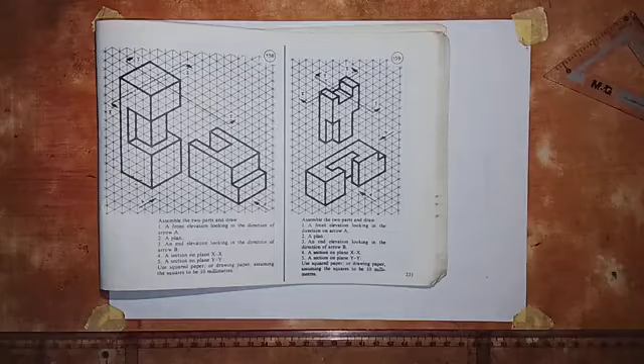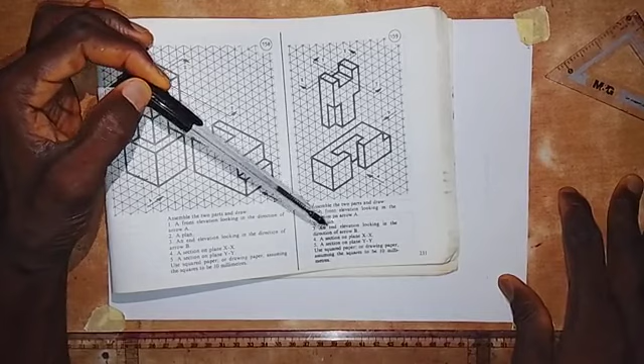Here we are still working on page 231 of J.N. Green's Technical Drawing Textbook, and I'm going to work on question 159: assemble the two parts and draw a front elevation looking in direction of arrow A, plan view for question 2, an end elevation looking in direction of arrow B for question 3, a section on plane XX for question 4, and a section on plane YY for question 5.

Use squared paper or drawing paper, assuming the squares to be 10 millimeters. I don't have squared paper, so I'll be using drawing paper here.

We are going to assemble this part first, and for the remaining questions we have a video for each one, including this assembly. So let's assemble the part first, then we'll work on the front elevation and the other questions, each with its own video.

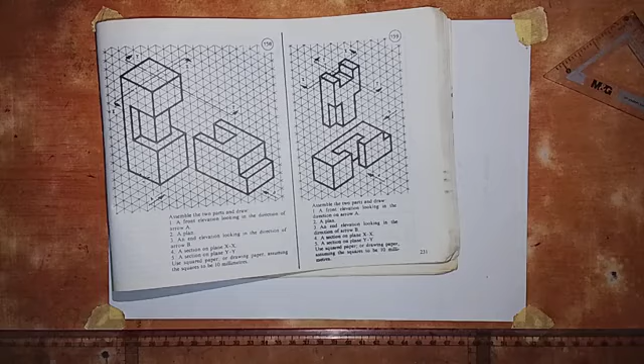For the assembling, we are going to put these two parts together. This one enters here, so we are putting this one entering into this. First, let's start with the construction of this one, then bring it in.

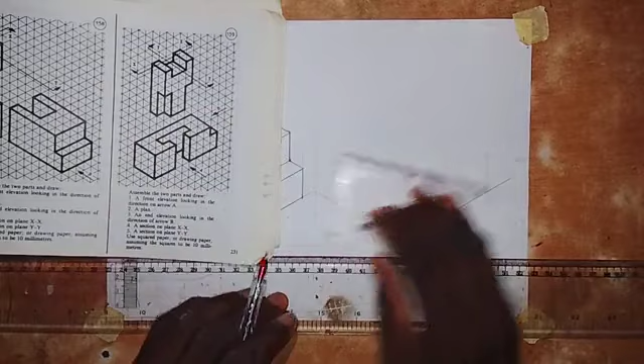So let's start. First I'll take my set square and draw a line in this direction, like this. Then I'll also draw a line in this direction, and then I'll draw a vertical line here.

Let's take the measurement. We have to count the number of squares to know the length. So we have 1, 2, 3 - let me break it down so I can bring out this picture. This is 1, 2, 3, then 1, 2, so that is 5, 6, 7, 8, 9 - that is 90 millimeters long.

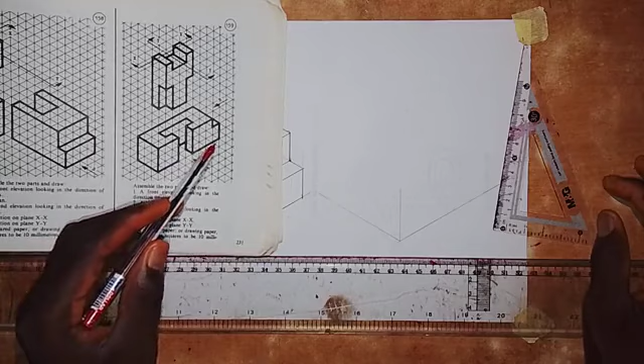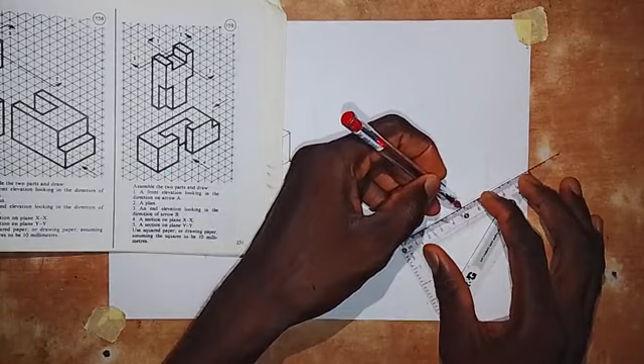Let's take the measurement: first that 3, so that is 30 millimeters. Then the next one we have 1, 2, so that is 20 millimeters. Then next we have 1, 2, 3, 4, so that is 40 millimeters. So we have this now.

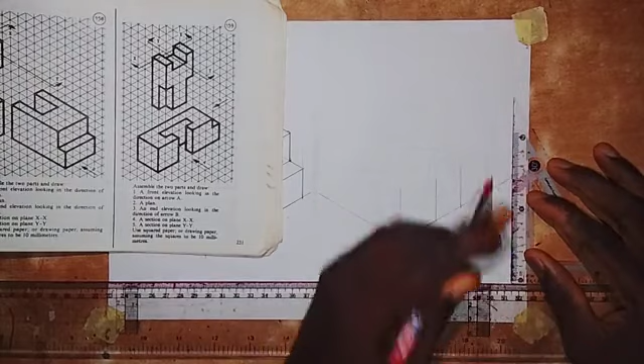On each of these points I'm going to draw a vertical line, just a short vertical line. So here we draw a vertical line, and coming to this point we draw a vertical line, and at this point here I'll also draw a vertical line. So we have this now.

Now let's take the measurement as we have here. From here to here is 30 - this is 1, 2, 3. But before that, let's work on this face, which is also 1, 2, 3. Then from here to here, 1, 2, 3, so we take 30 millimeters on this line here.

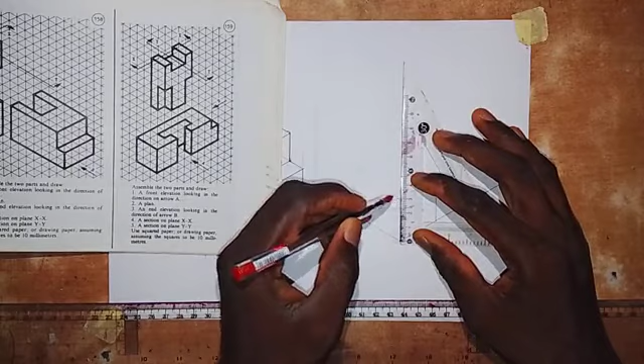I'll come to this side also and take 30 millimeters, so this is 30 millimeters here. At this point I'm going to draw a vertical line up. Then I need to join this together so that we know we already have this face here - I'll draw this, so it's a square.

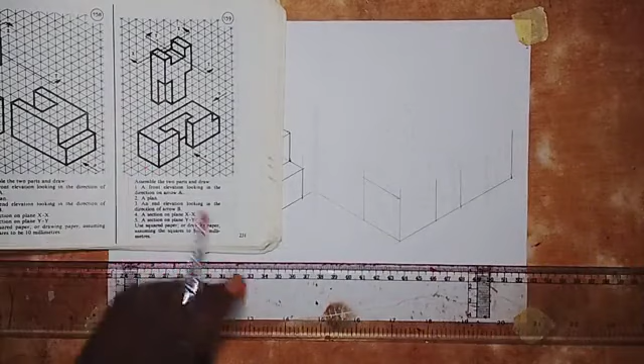Other things I'm going to do is transfer this point onto this line that we have here, like this. So we have this now. I need to join this together, and also join this together. We have this now.

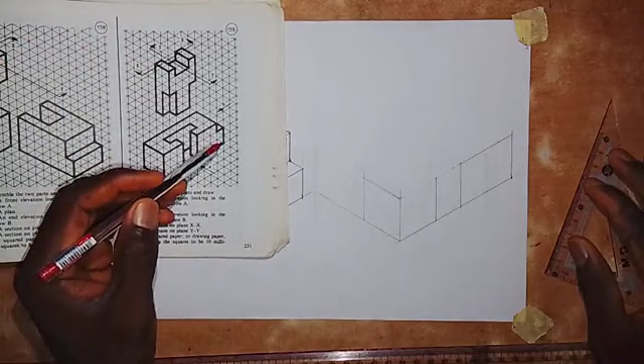We need to produce this feature that we have here, as we see it here. So we have that 1, 2, that's 20 millimeters - take 20 millimeters up, so this is 20 millimeters.

Then we are going to draw - this line that we have here, we take this in a bit, by 10 millimeters. So this comes in, and we take 10 millimeters here, so this is 10 millimeters. I'm going to draw a vertical line at this point.

So we draw a vertical line up like this. Okay, then the next thing that I'm going to do is transfer this line. I'll transfer it, taking it forward like this. So we have this now.

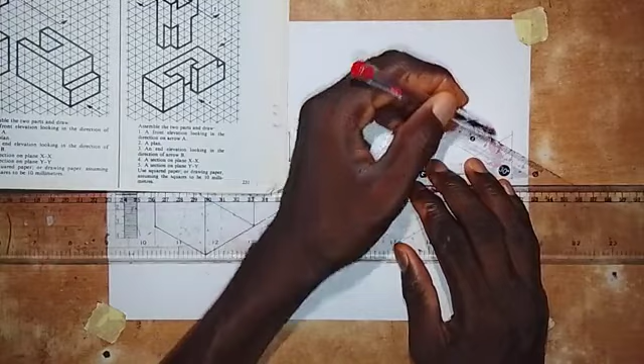So what I'm going to do now is join these two points, join a point with this, okay? Then I will come to this point here and draw this line. So if you look at what we have here, this part is now being shown here. So you can see it very well.

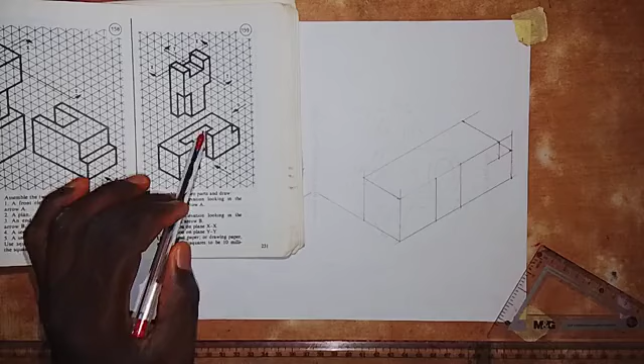All right, so then the next thing I'm going to do is form this surface, though if we do not form it, we are still going to get the work done. I don't want us to produce it, because by the time this one comes in, it will cover everything. So these two lines that we have here are going to be merged with these two lines here, so they just form one line together.

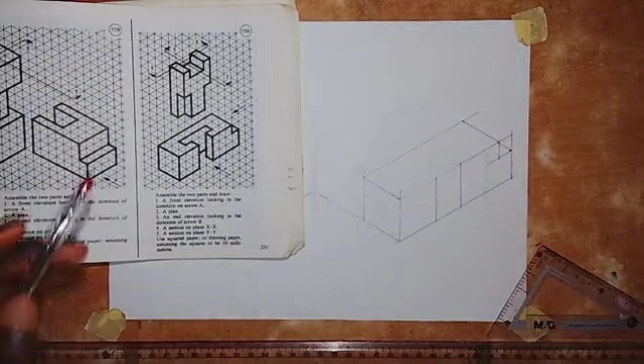All right, so let's bring this in. So by the time we put it in, let's count. So that is 1, 2, that's 20, and this one is 30.

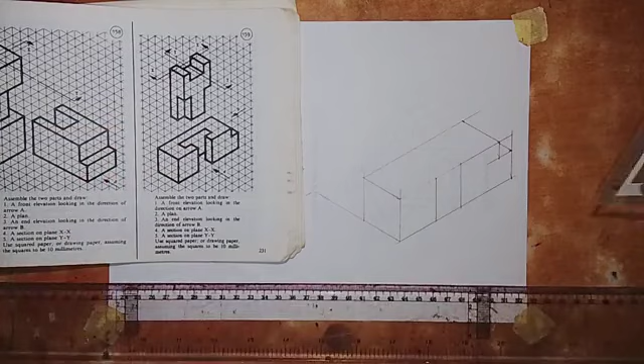Okay, so this part here is entering into this. We need to form it. Let's form that part, that feature, let's form it.

So I'm going to draw a line in here, and then come here and draw a line like this. Okay, draw a line here.

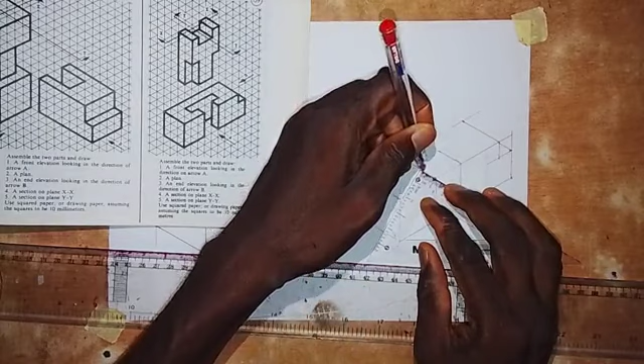All right, so then we take a measurement of 10 from here to here, that's 10. So you have to take 10 millimeters from this point in, okay. Then we also take another 10 from this point in here, okay.

So then I'm going to draw a line, okay. So I draw a line here and here, okay. Then I'll also draw a line, okay. So it goes like this.

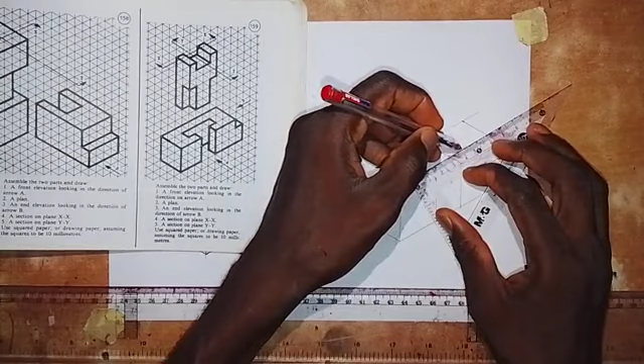All right, so then I will take a measurement. This is also 10 from here to here. So I'll take a measurement of 10 millimeters to this side. This is 10 millimeters. And from this point also, I will take 10 millimeters to this side. This is 10. Okay, so by the time...

I'll draw this line. Okay, so then here also I will draw a line from this point to touch this line. Okay, so with what we have here, I don't have to draw. There's a line that's supposed to go in, which I'm not going to draw.

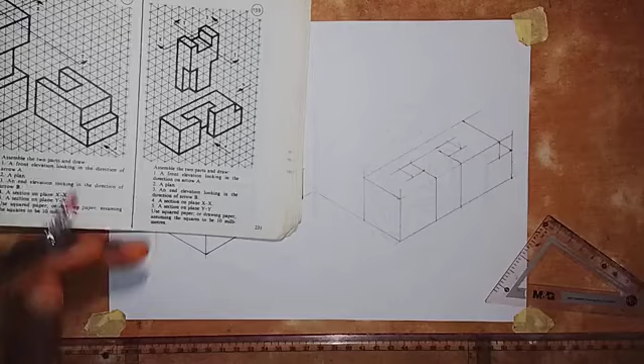Okay, all right, so let's bring this one in. So by the time we bring it in, this line here and this line will be merged with this line that we have here. So what we have to do now is that...

Okay, so this one that we have here, what we are going to see actually by the time it enters into, because what we have here from here is 1, 2, 3, and then what we have here is 30 millimeters, so that it goes in.

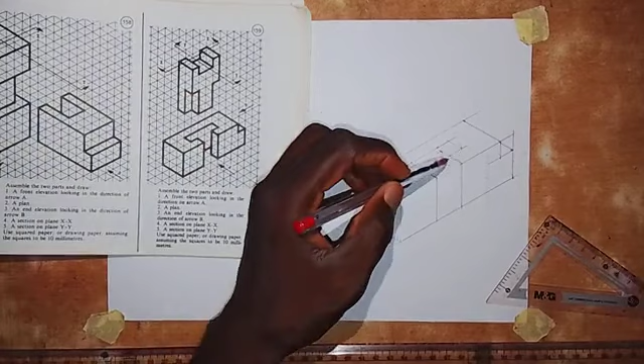So what we have to produce is this line, okay. So this line that we have here is already here, and this one is already here. So what we have to do is that by the time this part enters into it, we are going to be seeing from here up, okay, which is 30 millimeters.

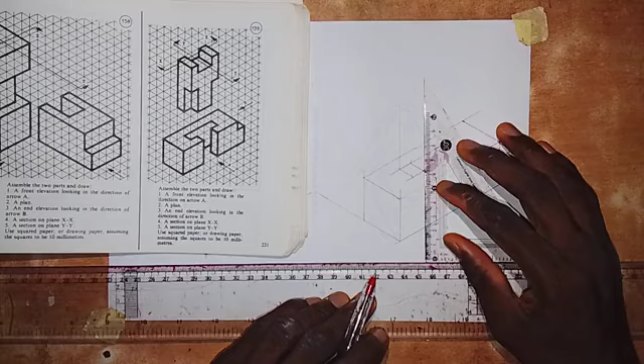So what we just need to do here now is come to this point and draw a vertical line like this. So here we draw a vertical line like this, and then we also come to this point here. So at this point also, we draw, okay.

Okay, I'm looking at it. So by the time, okay, so this line, you have to draw this line. We have to draw it forward, okay. So it has to come forward here. So we have to draw it forward here, touching this.

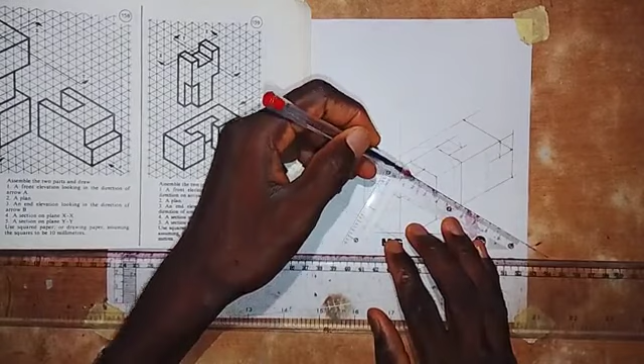And then at this point, I'll also draw a vertical line. Here I will draw a vertical. So the vertical line that I just drew is meant for this.

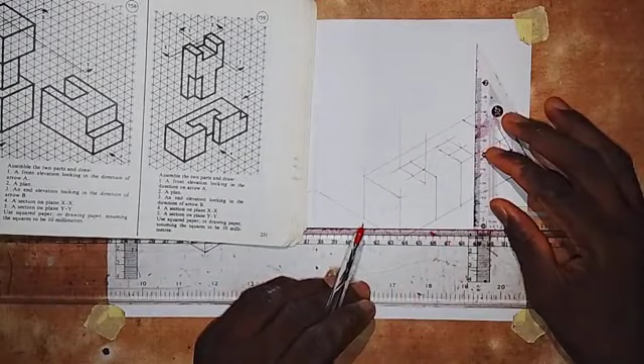Okay, so then we also need to come, I need to transfer this also. I need to bring it forward here to touch this line, okay. Then at this point, I will draw a vertical line up, so it goes like this.

Then we'll now take 30 millimeters. So we take 30 millimeters from here. So this is 30 millimeters. So we are transferring this, okay, so we transfer this point.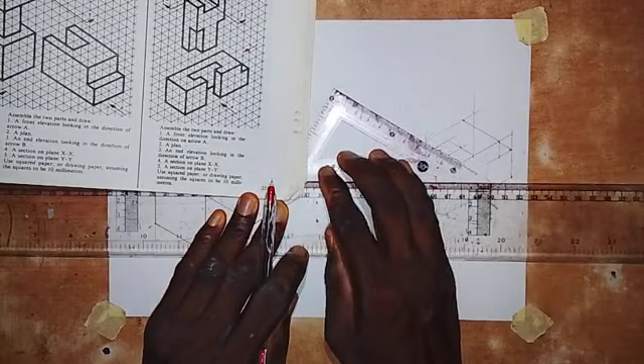So we transfer this point, so it falls on this line. We don't have to draw it, it's already there. So I'm just going to join this point, draw a line from here to join with this line. Then from this point, I will draw a line in this direction, and from here I will also draw a line in this direction to touch this.

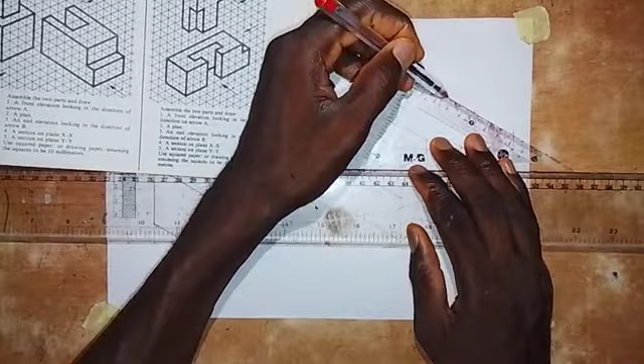Okay, so what we need to bring out now to complete it is this feature that we have here. So if you look at it, this is 1, 2, 3, 4, so it is 40 millimeters. If we measure this, this will be 40 millimeters. So this is it, 40 millimeters.

So from here to here is 10, from here to here is 10, so we have 20 in the middle. So we take 10, this is 10 millimeters. And I'll come here and take another 10.

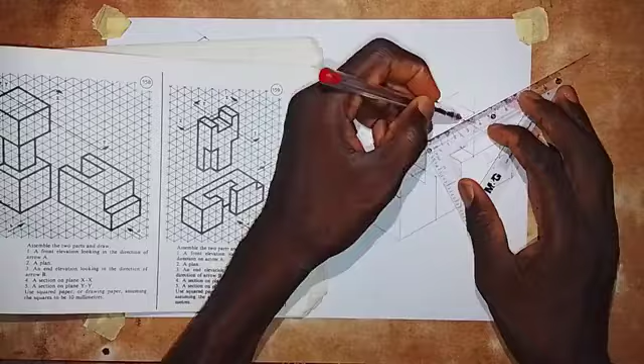So I'm going to transfer these 2 points. I will transfer them to this line. Okay, so then I come forward here, I also transfer to this line.

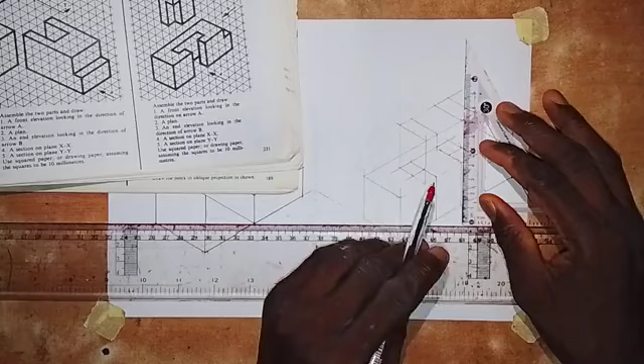All right, so then I need to take a vertical line down from this point. So we take a vertical line down here. Okay, then come here, I take a vertical line down. So the depth of this is 10 millimeters, so I need to take a measurement of 10 millimeters from here down.

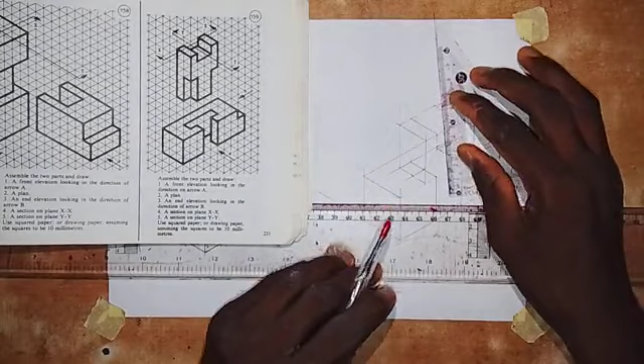Then I will now transfer this point. I will transfer it here, touch this. Okay, so from this point, also, I'll come to this point here and draw a vertical line down.

Then I will now transfer this point, so I'll transfer it here. Okay, then at this point here, I'm going to draw a line to touch this.

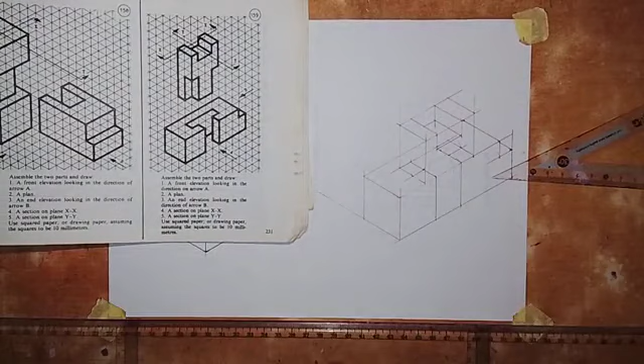All right, so we have completed what we have here, we have assembled it. So what I need to do now is make some lines visible. So starting from this line here, we have to make it a thick line.

And then we have to make this line, so make it a thick line from here to here. All right, so the whole of this line all to the end will be a thick line like this.

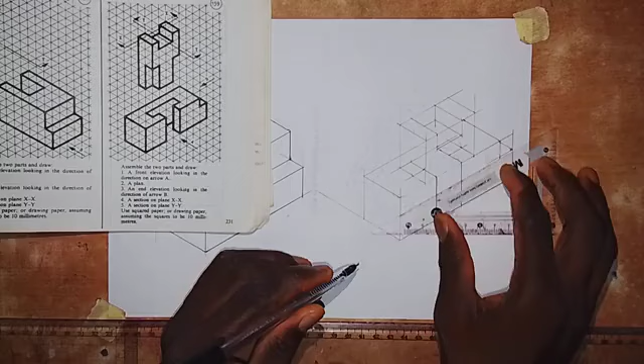Okay, and then this line also, so the whole of this line will be a thick line. So from here to here we make it a thick line because this surface that we have here, the line will be a thick line from here to this end.

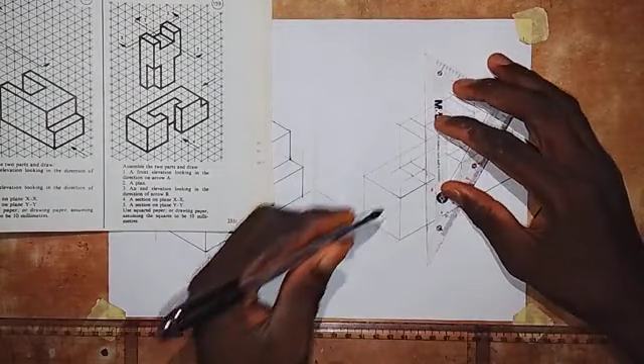Okay, so we have this now, and then let's make this line a thick line. Okay, and then we also make this line a thick line from here to here. All right, so and then this line will also be a thick line.

So this vertical line here, so bring it out with this vertical line that we have here, and then this will bring it out like this.

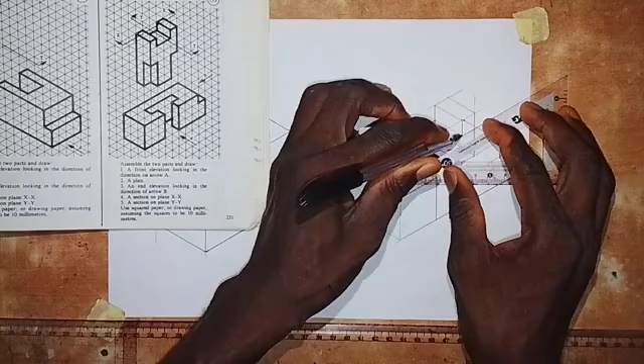Okay, so then let's make this line a thick line, from here to this end, and then this short line, so make it more visible, and then here make this visible.

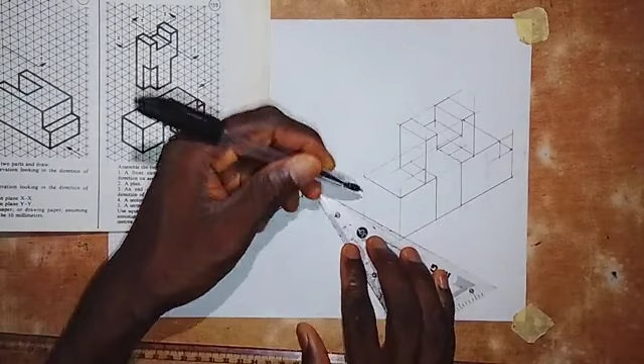All right, so let's work here. So this line, we made a thick line, and this line also.

All right, so we have this. All right, so this short line and this line too.

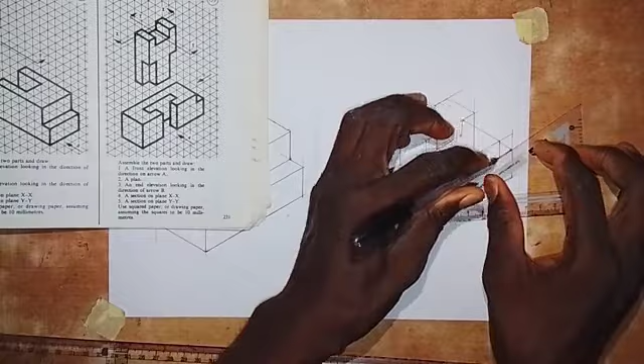So those two lines are not together.

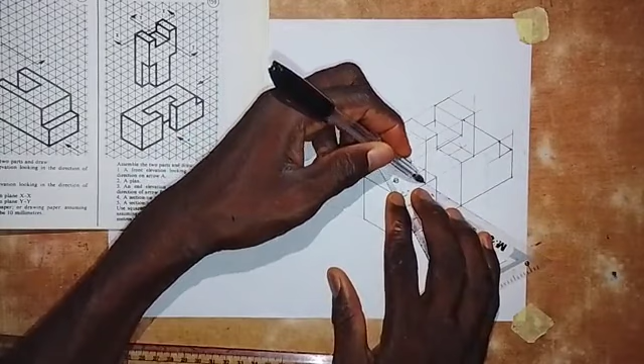So all right, so what errors do we have? So we need to make this line a thick line, and this line here too should be made more visible, and we'll come here to make this a thick line.

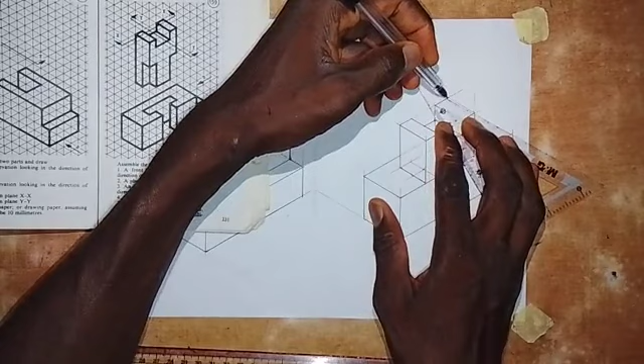This should be a thick line. This line, so make it visible. Okay, and then coming up here, so we draw this line, and we also draw this as a thick line.

All right, so what else do we have to show here? So everything has been completed. So we have the two parts assembled as you see it here.